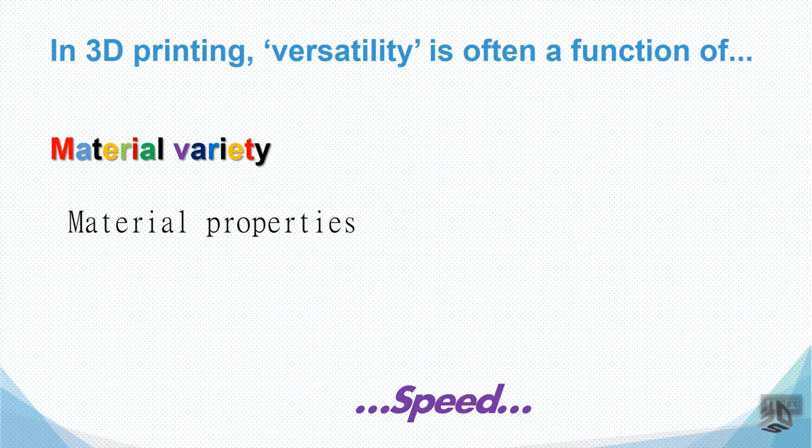To start our discussion, we first need to define a few things. What do we mean when we say versatility? The versatility of a 3D printer can be measured by many factors, or even all of them together. For example, material variety, the properties of those materials, the strengths, the temperature resistance, the speed of the printer, the build volume, ease of use, and fidelity, which means the representation of the final product you're trying to eventually create.

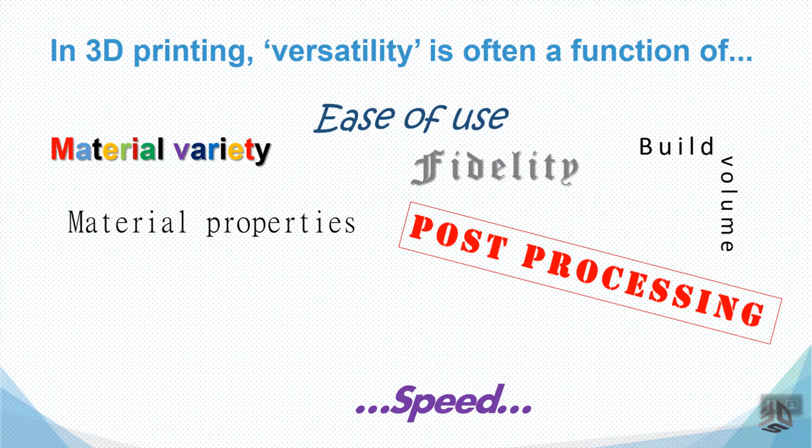Post-processing—how easy is it? Surface quality of the parts, the resolution of your printer, and the operating environment the printer works in—whether it requires a special setup, whether it's green, whether it's user-friendly. All of these factors together really determine versatility in terms of 3D printing.

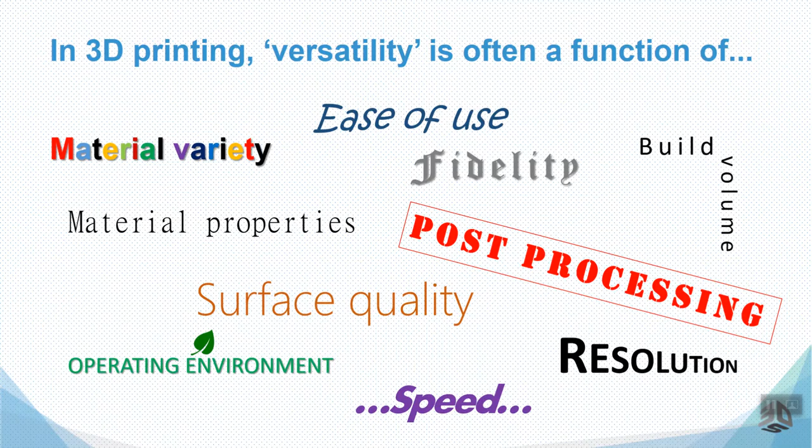Now that we've defined versatility, what are the 9 ways that MJP technology delivers it? First, MJP technology is able to reproduce the finest design details. We're constantly innovating in terms of materials, which enables us to open up new applications to the market. We're able to create moving assemblies out of the printer. We're able to lightweight otherwise heavy rigid parts. We can simulate glass and PMMA with clear transparency.

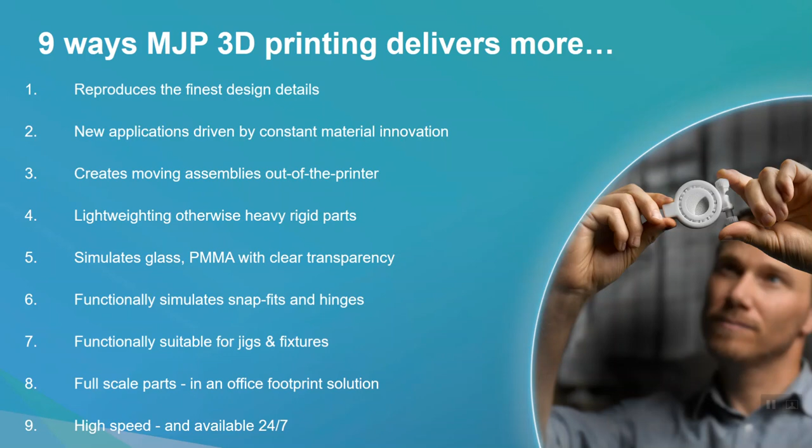We can functionally simulate snap fits and hinges. The parts and materials are suitable for creating a large range of jigs and fixtures. We can create many full-scale parts, but in an office footprint solution. And of course, the speed, which is very high, and availability, which is 24/7. So let's dive into each one of these separately.

What is it about MJP technology that delivers the finest design details? First, MJP stands for multi-jet printing, which uses inkjet printheads to jet an acrylic-based resin that's cured by UV light on the build tray. This technology is known for its very high fidelity, meaning the representation or realism of the final product. Fidelity is a function of surface quality of the part, and also of accuracy and resolution.

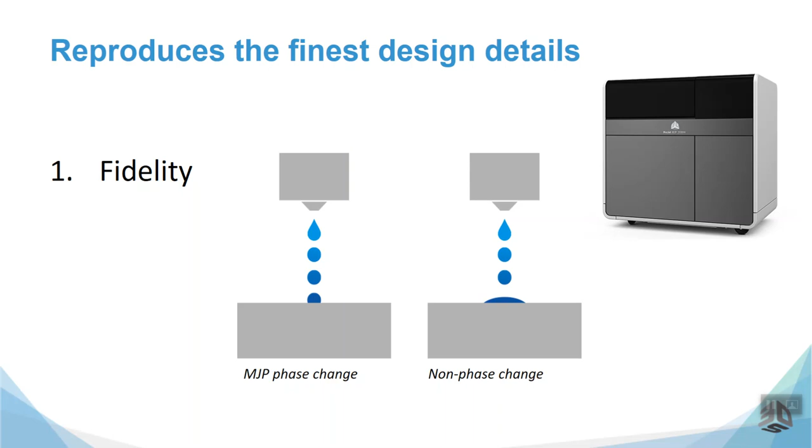But it turns out that even more important than raw resolution is the chemistry and process the printer uses. MJP technology uses proprietary thermally controlled materials. As each heated droplet of material is jetted, it immediately cools and holds its shape as it lands on the build tray. The result is that the printed material doesn't ooze over the edges or pool in the corners. So the edges are 90 degrees sharp, the holes are round, the corners are clean, and the sidewalls have excellent surface quality.

Now combine that with the fact that we have very high resolution. The Projet MJP 2500 system prints at a resolution of 800 by 900 by 790 dpi. For comparison, the limit of the human retina is just 300 dpi. You're also printing at 32 micron layers. Overall, that means we're printing 568 million droplets of material per cubic inch.

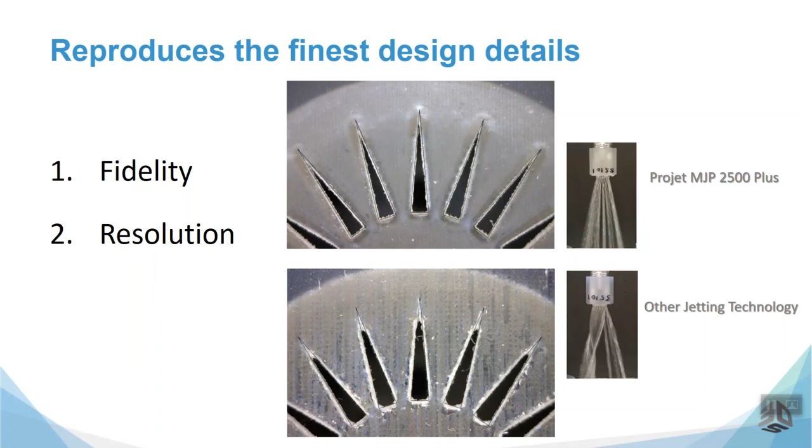Now, the next factor that's often overlooked but really critical is support. This is where jetting technology really differs from other technologies such as SLA. Jetting technology allows you to separately jet a model material and then a different support material, rather than using the same material for model and support, which means you'd have to cut those support structures off somehow. MJP technology takes this advantage even a step further—not only is the support material a different material, but it's been optimized for really easy and fast removal.

For bulk support removal, you simply place the parts in our finisher oven or the Easy Clean steamer system, and then the remaining support wax is easily dissolved away using a hands-free automated process, either in an ultrasonic bath or using our Easy Clean system, heated at 65 degrees.

You can use either mineral oil with a few drops of dish soap, or the Easy Rinse solution with water, and then those support waxes quickly and easily dissolve away in a very green process. So this process takes care of the very fine details of the part.

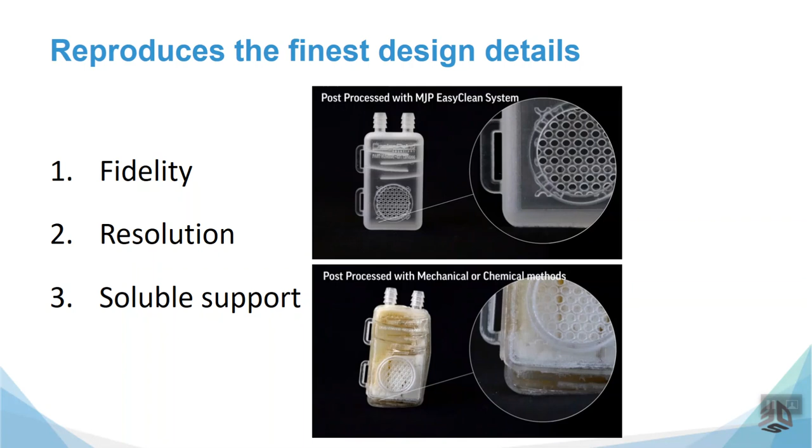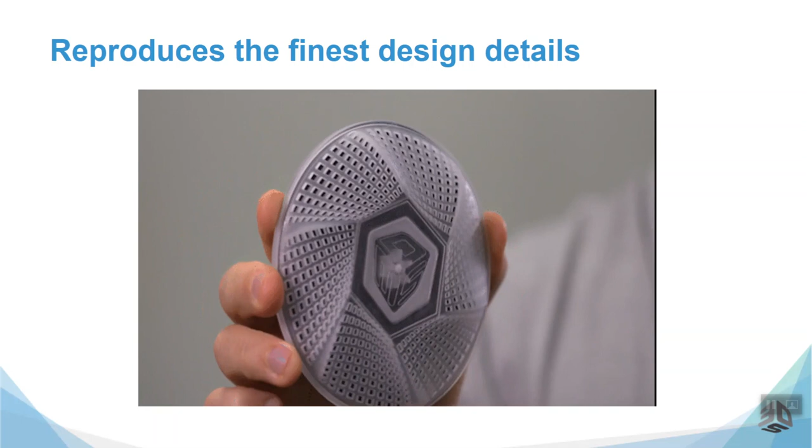So you see the holes on this filtration device are clean of support and sharp, unlike other jetting technologies, and the curved surfaces are smooth without any stepping effects that you typically find in some technologies such as FDM, for example. So this is a nice part.

Now the next point that's really critical is materials, both material range and material capabilities. And 3D Systems has really invested a lot to make the materials as functional and versatile as possible. So we have a number of great modeling materials in white, clear transparent, and grey. These are the VisiJet M2R white, M2R clear, and M2R grey.

These materials feature rigid functionality, moderate flex, and a look and feel of injection molded plastics that are suitable for most common prototyping applications. They're both durable and stable under most conditions, making them ideal for visual concept modeling applications.

Then we have the VisiJet M2R clear and white, which are both class 6 capable for medical, biocompatible, and skin touch applications. Another great material is the VisiJet M2R tan material, which is a really high quality, high contrast material

with good modulus and a heat resistance of up to 71 degrees. So that's 71 degrees Celsius, by the way.

And then we have the VisiJet M2R black, a rigid black material, which has great rigidity, low flex, as well as a high temperature resistance and a nice opaque black finish. This material is ideal for applications that need stiff dimensional performance and quite a high temperature resistance.

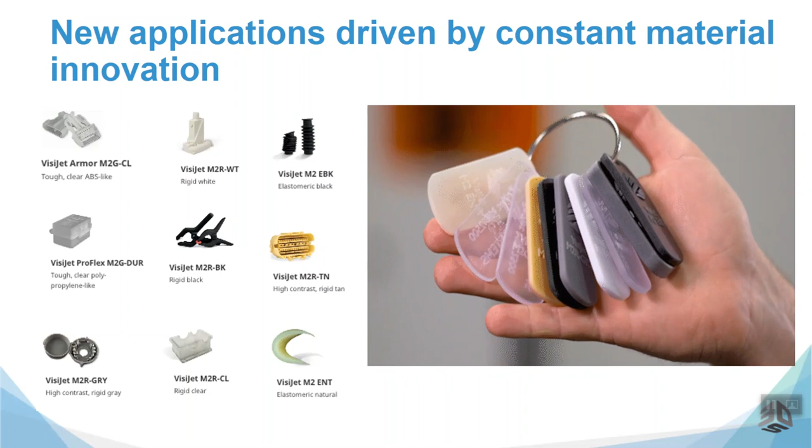And then we have two elastomeric materials, the elastomeric black and the elastomeric natural. All these materials are excellent for printing soft rubber-like parts such as gaskets, piping, rubber buttons, and more. So our rubber-like materials offer the best combination of pliability and strength with amazing elongation and a really good elastic memory.

So in these two clips here, I've printed a couple of nice parts for you. The left part is printed in the M2R rigid black material. The part is a really nice size and it's got great dimensional performance and quite a high temperature resistance, making it a great design and functional performance prototype.

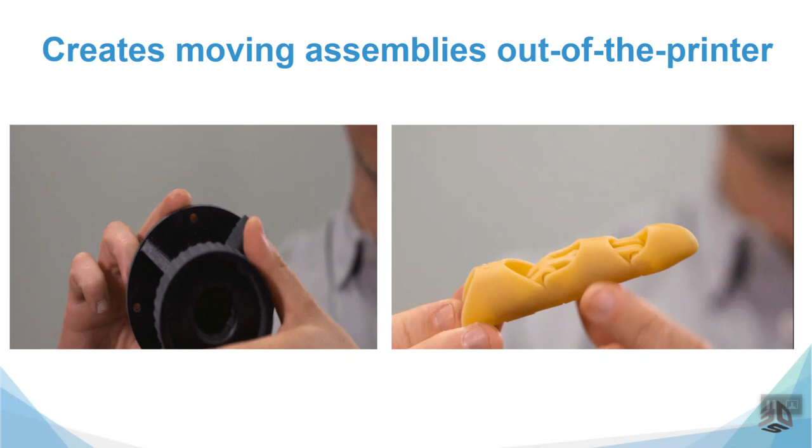But what's really great here is that the part features a functional screw thread assembly that came like this out of the printer, thanks to the soluble support and the high fidelity and resolution of the printer.

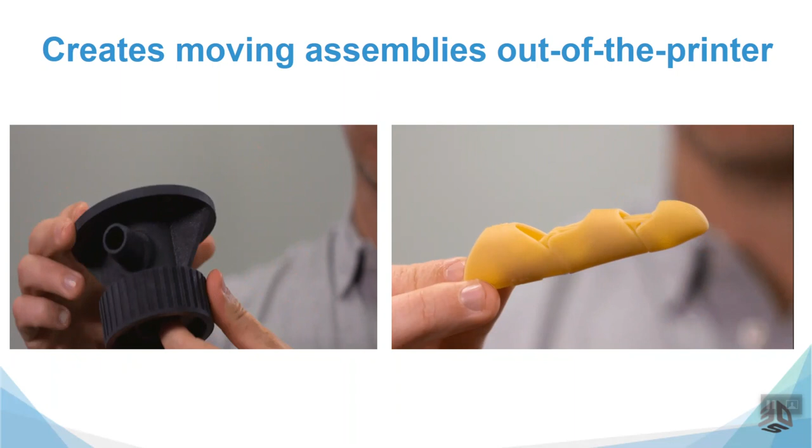The clip on the right side is printed in the tan material that we mentioned earlier, and again, it was printed as a finished assembly with smoothly working, accurately printed, and fine detailed joints and hinges. Again, both these parts are ideally printed in MJP technology, both in terms of the speed to final part and the final quality of that part.

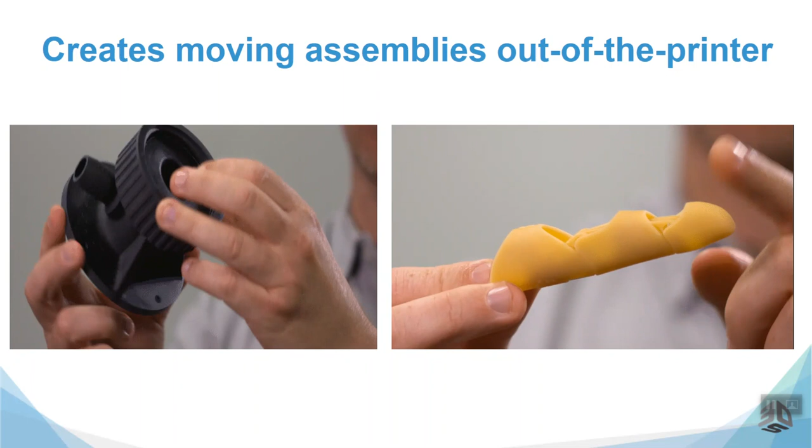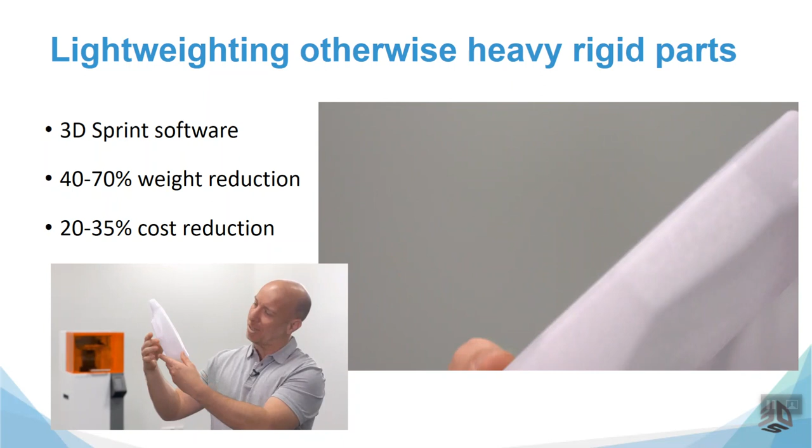Okay, so in this slide, you get the pleasure of seeing me here in person in the bottom screen. Here I am, I've printed one of my favorite parts. This is really a unique feature of MJP technology. This is a part of a commercial drone. In fact, it's the body of the drone.

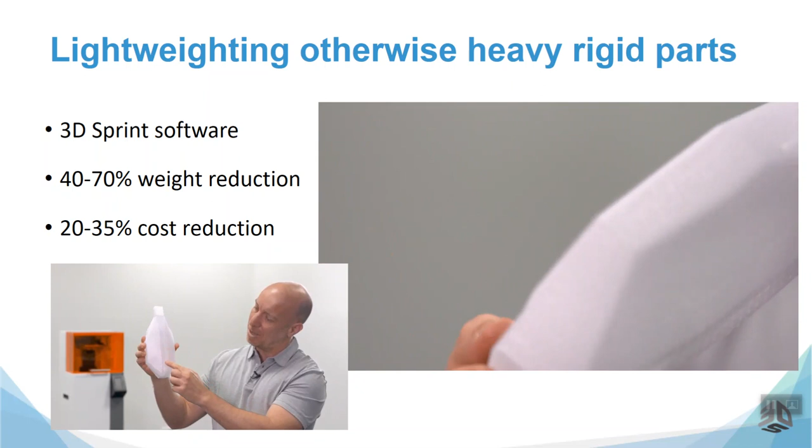The designers of this part needed a technology that would be able to accurately reproduce both the propeller blades of the drone and the body. Now, jetting technology like MJP is ideal for creating those blades that need to be fine detailed and smooth. But resins are typically quite dense and denser than regular plastics, which means other jetting technologies would be unsuitable for printing the body of this drone. They would just turn out too heavy for the drone to fly.

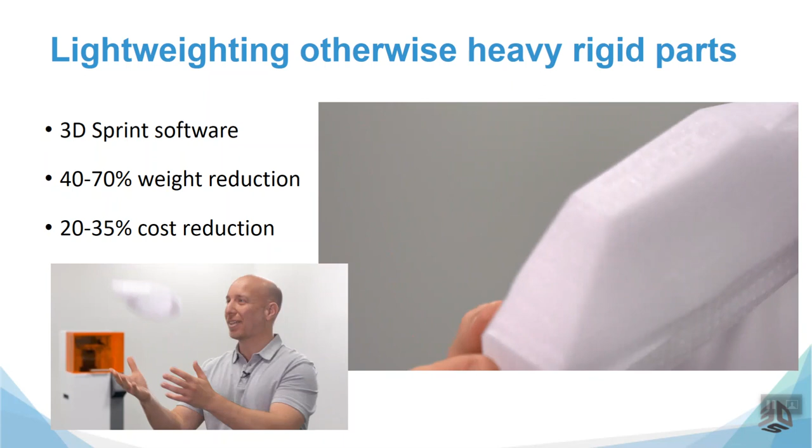So typically they'd need a jetting system to create those blades and maybe an FDM system to create the lightweight body. However, this is where MJP technology really shines. It can really do both of these parts using the lightweighting function of our 3D Sprint software package.

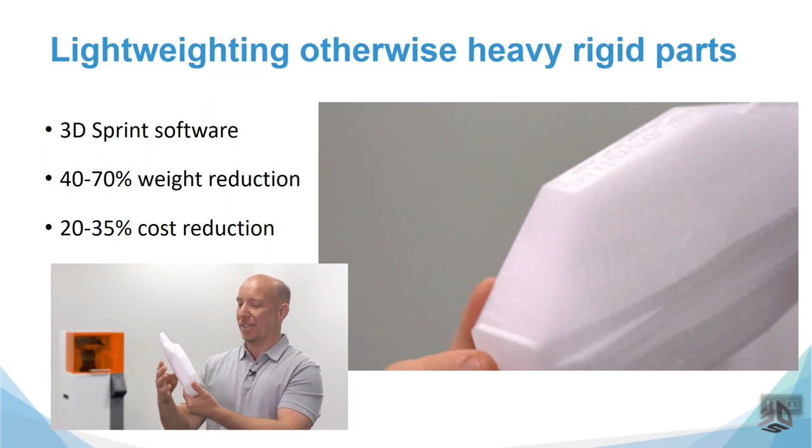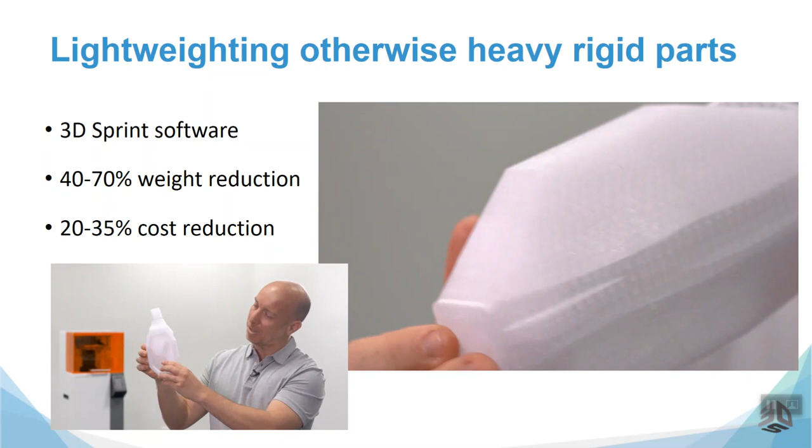So among many other features of the 3D Sprint, it allows you to quickly and automatically create a sparse, hollow structure to your part, as you see in this top GIF here. And with a soluble support and some cleverly located drainage holes, you can really end up with a part that's much lighter than typical. In this case, it's 70% lighter than a fully printed part, but with almost no loss of strength. And of course, when you're using less material, you're cutting your cost per part down, in this case by up to 35%.

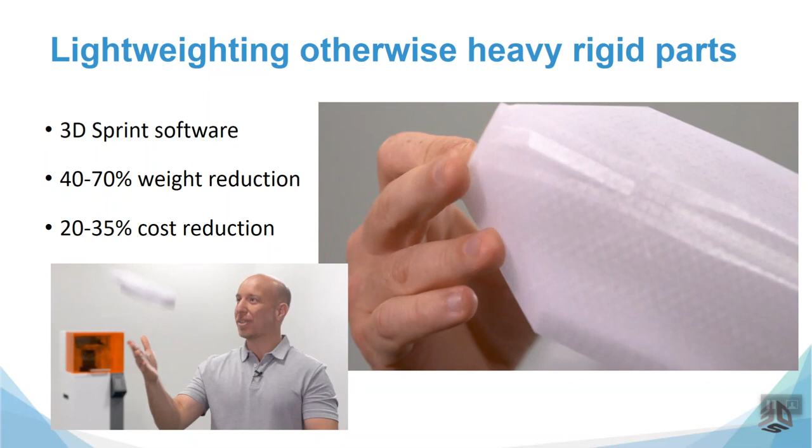Another important feature of MJP technology is the ability to produce really clear, transparent, yet functional parts using a choice of two different clear materials. The VisiJet M2R Clear, which as I mentioned a few slides back, is biocompatible class 6, which makes this a great choice for medical devices where you need contact with the skin or mucosal membrane, and where you need to see through the parts, such as in a surgical guide or devices where liquid or gas is flowing through the system. The second material is the VisiJet Armor.

MJP technology is an excellent way to iteratively test complex and fine detailed snap fits. So stress concentrations, stress relaxation, and fatigue are all quite difficult design considerations, and they can be very constraining for most snap fit designs. So the VisiJet Armor and the ProFlex materials were specifically designed to create robust snap fits that really simulate the properties of traditional injection molded plastics, as you see in this photo on the right and this short clip on the left.

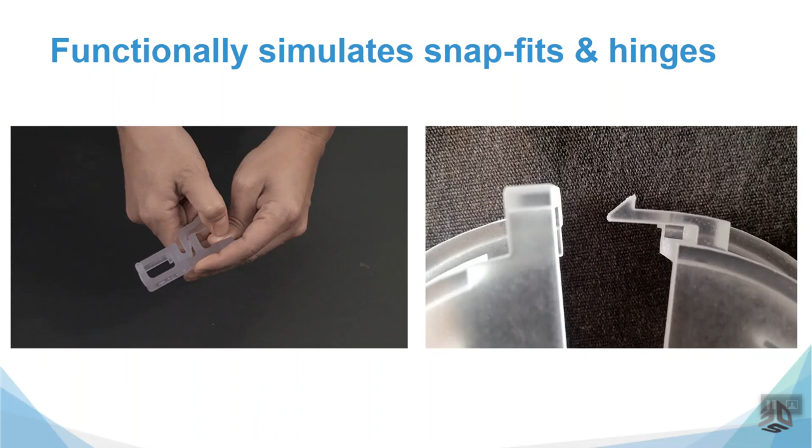So on the left-hand photo here, we have a printed assembly that has two printed hinges and two printed snap fits. One snap fit holds the top onto the bottom, and the other one allows the bottom half to split open, as you see in this picture. Both these snap fits are simple cantilever style snap fits with uniform geometry.

Now these features work really well in both the rigid and the engineering materials. In this case, it's the rigid grey material. But the other point I want to make in this slide is the ability to machine the parts once they're out of the printer. The rigid materials that we offer are extremely versatile for when you need to drill the parts or tap holes or press fit precision dowel pins. You can add screws to bosses, you can press fit brass inserts, as you can see in the right hand photo here, and you can machine precision holes.

In addition, you can also print those screw threads. That's the unique capability of MJP, which allows you to easily print most thread sizes, which can then be used in combination with standard threaded machine screws.

This is exactly what you need when you want to create a range of jigs and fixtures. In fact, in our engineering labs, we have jigs and fixtures at every single point in those labs. They're used everywhere. And I believe that's the case in most engineering departments and design departments. Jigs and fixtures are truly vital to the product that you're making. And it's important that you can really machine these materials and parts once they're out of the printer.

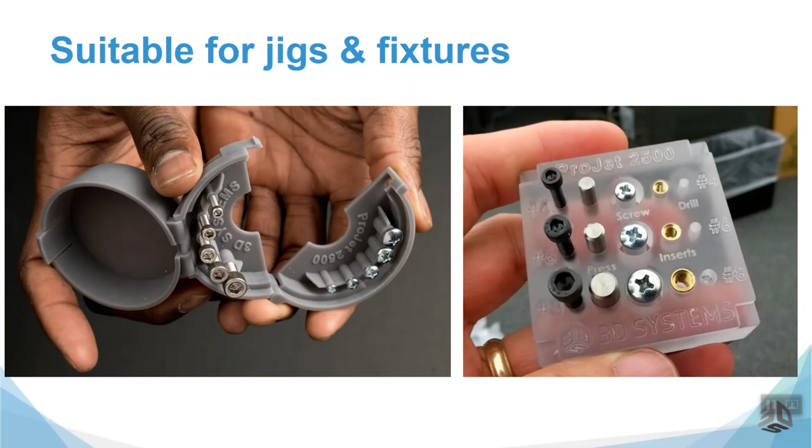Some considerations and changes need to be made when using these materials for screwing and drilling. The engineering materials have the highest elongation and toughness, and that's what we recommend for most engineering applications. Remember, when printing holes, make them slightly larger to reduce the hoop stress. You can add material or make walls a little thicker in prototypes or jigs and fixtures so they can withstand higher hoop loads without cracking and breaking. Different screw types can create different hoop stresses, so pilot holes should often be used to reduce cracking and breaking on some parts.

Another aspect of versatility that really shines with MJP technology is the trade-off between officeability and part build volume. With the ProJet MJP 2500 Plus, shown in this photo on the right, you get a build volume that's big enough for the majority of full-scale parts, especially across a wide range of industries classified under consumer goods and consumer electronics, such as this drill with a 3D printed clear transparent cover that's been machined onto a working prototype.

But also the system itself, although industrial in terms of productivity and output, only weighs 211 kilos, with dimensions of 1,120 by 740 by 1,070 millimeters. It fits nicely into most office rooms, so it's just over 1 by 1 meter in the XY direction and almost a meter in terms of height.

Once it's in there, it operates quietly at normal room temperatures with no offensive odors. And importantly, the post-processing of the parts requires no special installation, and it doesn't generate a messy work area like you would get with some other 3D printing technologies.

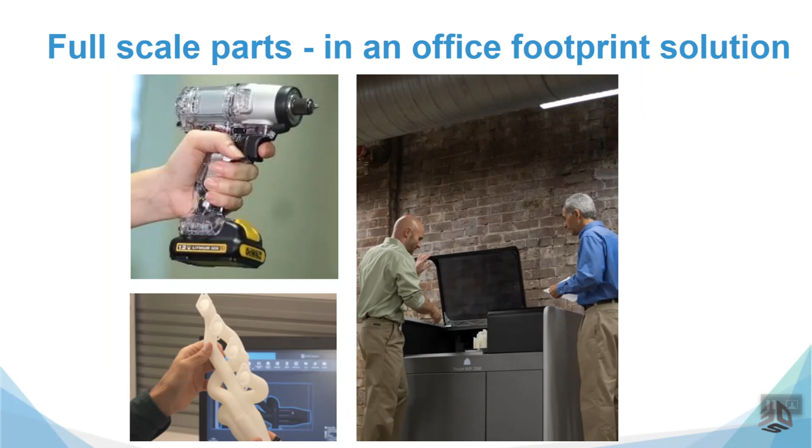In fact, there are many jobs where it's just as quick, or nearly as quick, to produce multiple parts as it is to produce just one. That's because the print process runs along three imaginary lanes, if you like, inside the build chamber. If you're able to stack your parts or nest them nicely within a single lane, you can become far more productive on large or recurring jobs.

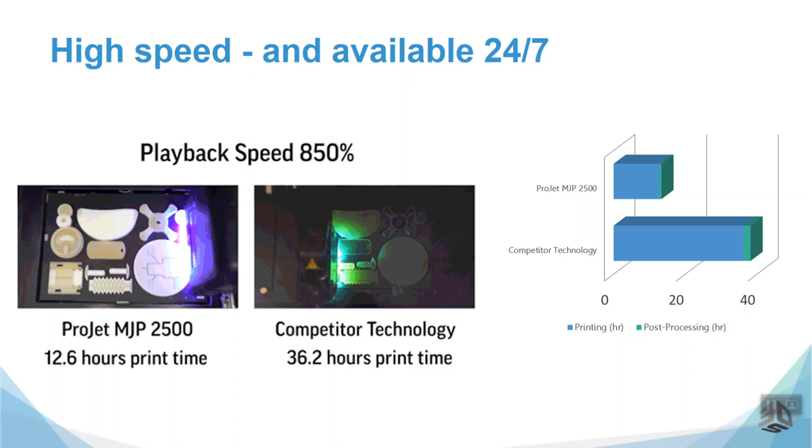With a print speed on the 2500 of up to 303 cubic centimeters per hour, which is 18.5 cubic inches per hour, most practical jobs will be finished in one day or overnight. Add to that the time and labor you're saving in post-processing that I described earlier, and the fast and easy job submission with the 3D Sprint software, and overall you're going to be extremely fast and extremely efficient.

If I could add a point that wasn't on my original list, that would bring us from 9 points to actually 10 points on why MJP technology is extremely versatile. It's a word about the importance of the vendor's expertise and experience. When purchasing a 3D printer, it's easy to just look at system specs, but the truth is the vendor's expertise and the support infrastructure they offer is critical to your overall success.

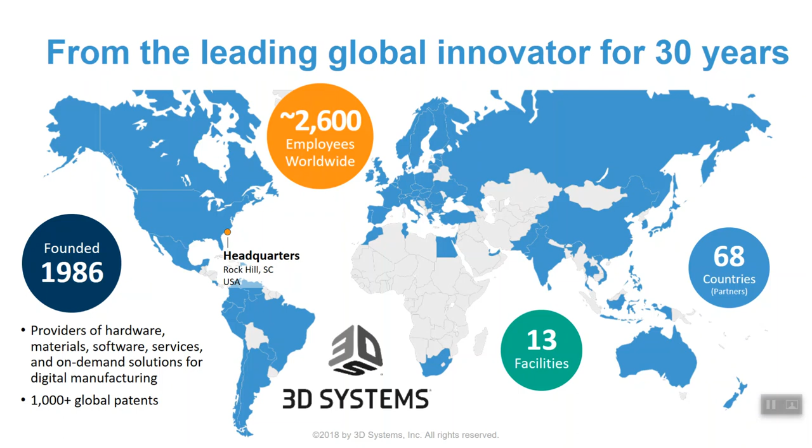3D Systems is a global 3D solutions company. We've got over 1,000 patents, 13 facilities worldwide, over 2,600 employees, and we have a presence in 68 countries with a very extensive partner base. More than any other vendor, I believe we have the experience and expertise to be totally focused on building the most reliable 3D printers in the world, and then connecting our customers with the expertise and digital manufacturing workflow they need to really solve their business challenges.

A final word about the future. Additive and 3D printing will continue to develop more and more, and the applications it will be suitable for will continue to expand, especially within your industries. As your company grows, you will need to add additional solutions and technologies. Today, there are very few vendors out there that can provide the technological breadth and depth of additive solutions to answer all of your enterprise requirements, and few can offer the software and services needed to really tie all those systems together.